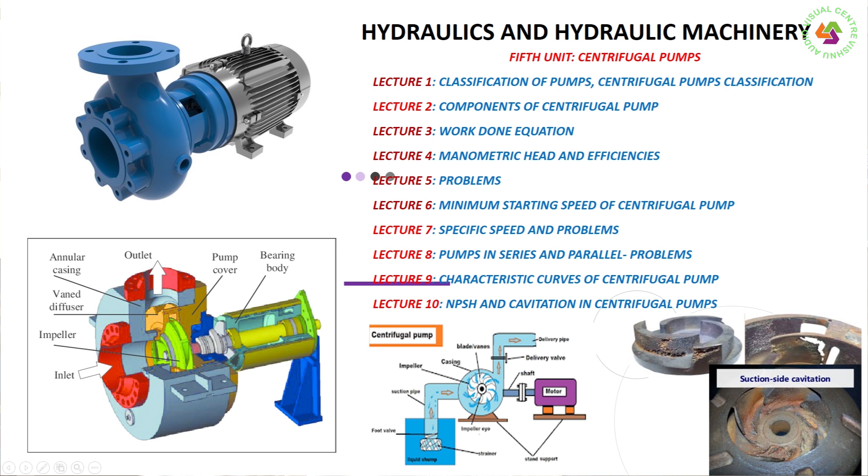A multi-stage pump means a centrifugal pump consisting of two or more impellers.

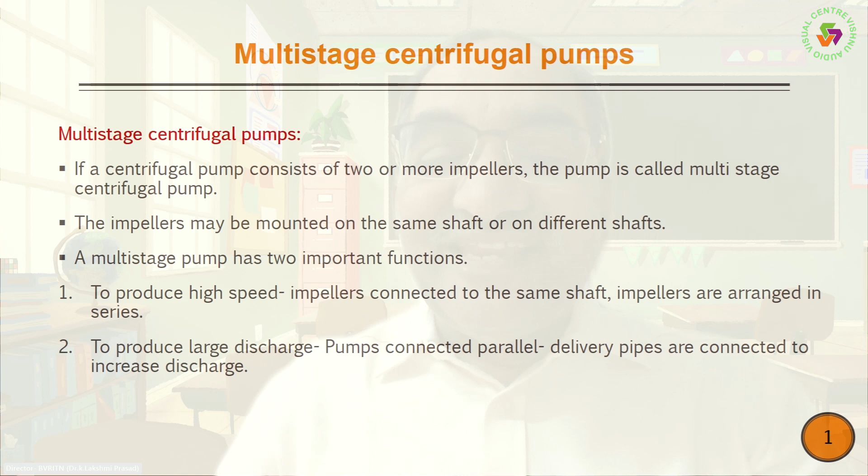They may be connected to the same shaft or to different shafts. If the impellers are connected to the same shaft, we call it impellers in series. If they are connected individually, one for each shaft, we call it pumps in parallel.

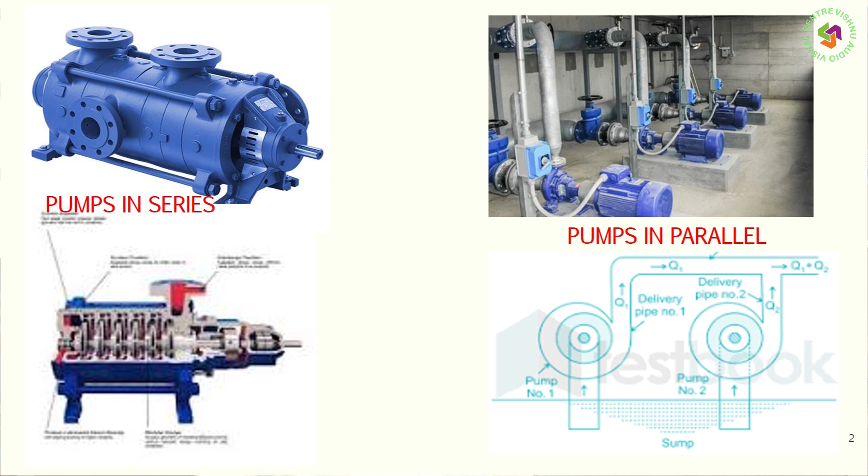So pumps in series, pumps in parallel. Pumps in series means number of impellers are connected to the same shaft. Pumps in parallel means each shaft has only one impeller. Like that we have different pumps, and the delivery pipes of all these are connected.

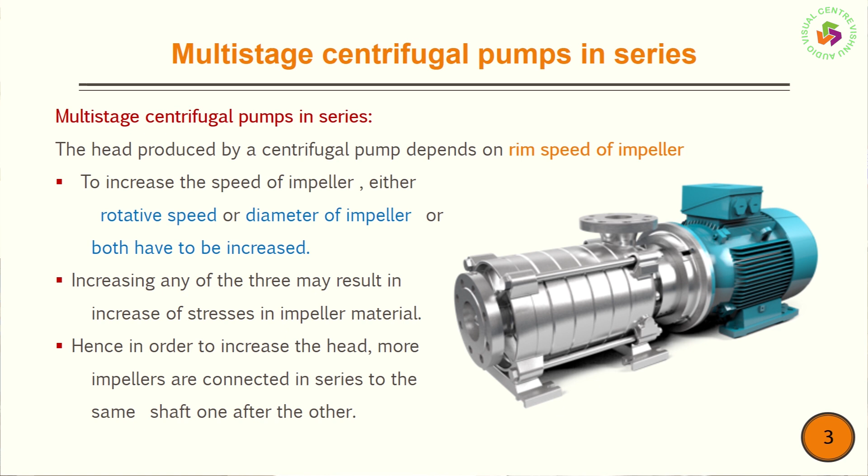Then why do we generally join more impellers? The purpose is to increase the head. If you want to increase the head, the option is either to increase the rotational speed of the impeller, or to increase the diameter of the impeller, or both.

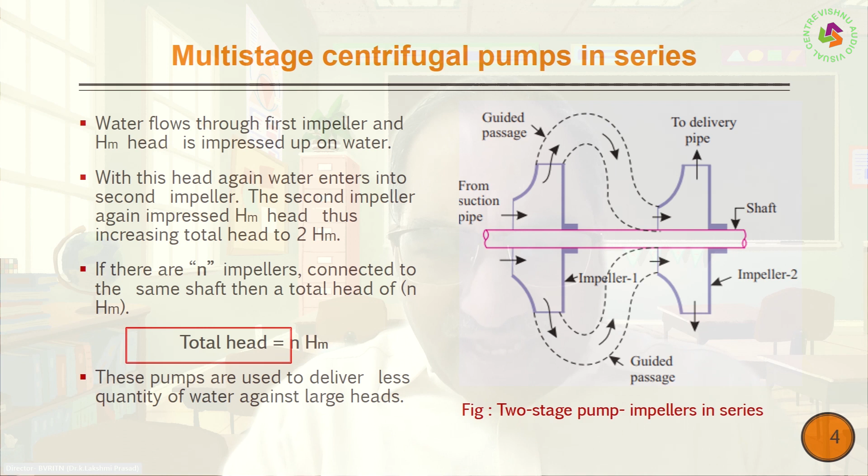If you go on increasing the impeller diameter and the speed, the stresses on the impeller will increase tremendously, and thereby the efficiency will be drastically affected. Hence, we arrange a number of impellers on the same shaft.

The same water flows through the first impeller, then through the second impeller, then through the third impeller, like that. So in each impeller, a certain head, which we call the manometric head, is impressed upon the water.

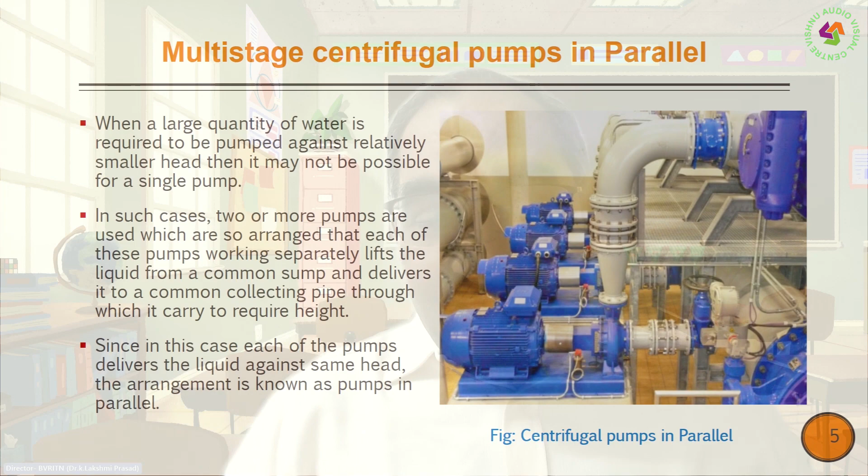When it flows through the first impeller, the manometric head impressed is HM. Again, the same water with a manometric head of HM enters into the second impeller, where it again impresses HM.

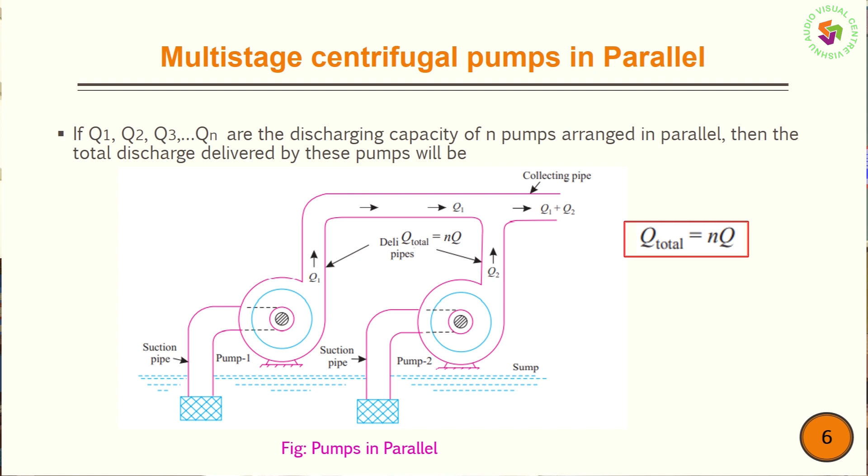So HM plus HM, by the time the water comes out of the second impeller, the total head will be 2HM. And if it enters the third impeller, then 3HM. If you have N impellers arranged on the same shaft, the total head will be N into manometric head.

So naturally your purpose is solved. It doesn't occupy much space. The diameter need not be increased, the rotational speed need not be increased, but you achieve your objective of increasing the head.

In order to increase the head, we connect the impellers in series, with a number of impellers on the same shaft. If there is only one impeller, we call it a single stage pump. Two impellers on the same shaft is a two-stage pump. Three impellers is a three-stage pump.

These three are common. Kindly visit the laboratory and observe. The moment you see a centrifugal pump, you can tell whether it has one, two, or three impellers. Visit the hydraulics and hydraulic machines lab of your department and see how many impellers are in the centrifugal pump.

So this is the starting point. Similarly, when pumps are connected in parallel, the first thing is we want to increase the discharge. If you want to increase the discharge, naturally each pump can discharge only up to a certain limit. So a number of pumps are connected, with the delivery pipes joined to each other. The first pump discharges Q1, the second pump Q2, the third pump Q3.

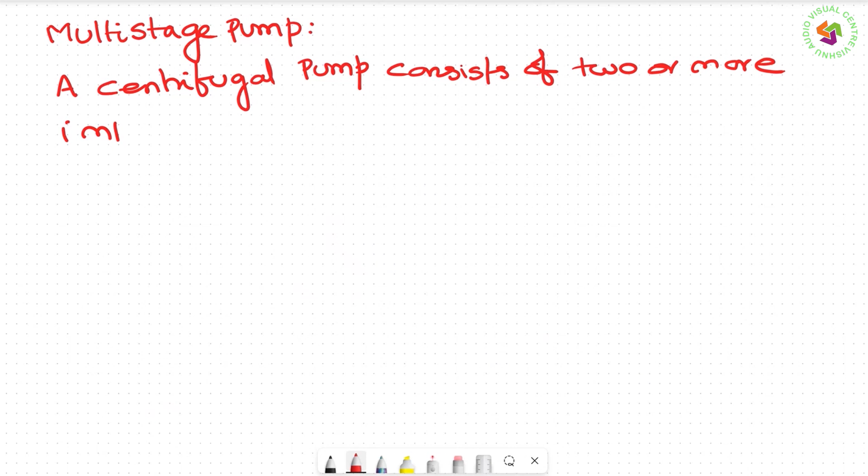A centrifugal pump consists of two or more impellers. Then the pump is called a multi-stage pump.

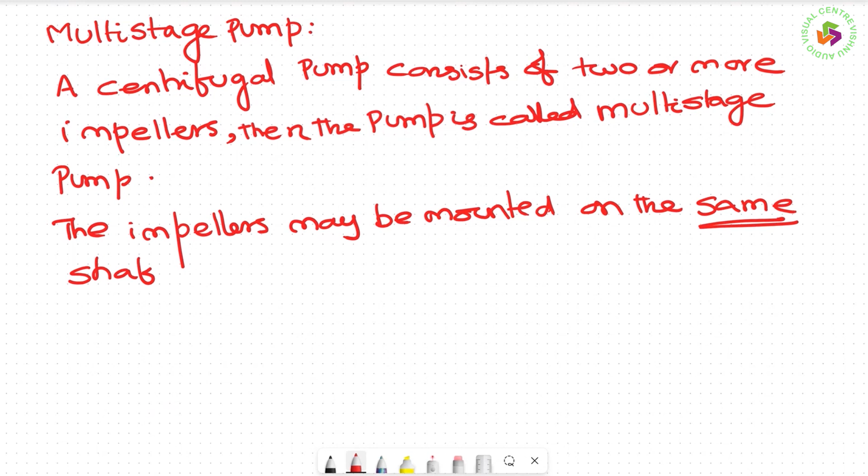The impellers may be mounted on the same shaft, or on different shafts - anything is possible. Then the functions of a multi-stage pump, which is very important.

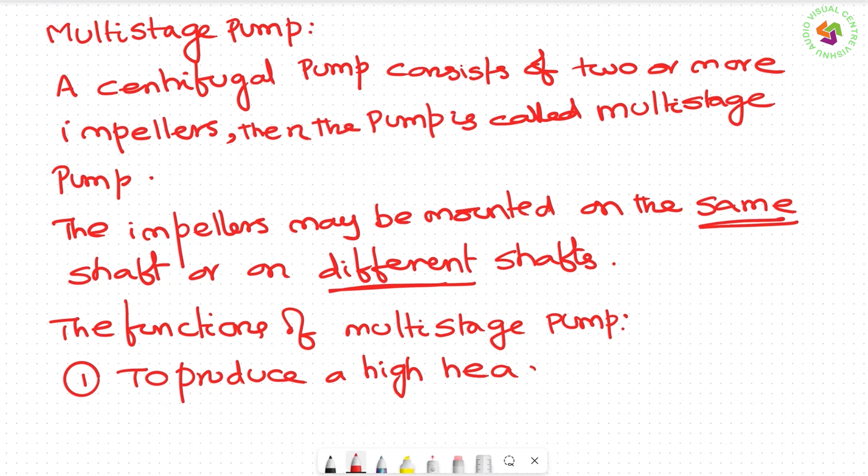The functions of a multi-stage pump: number one, basically to produce a high head. And the second function is basically to produce a large discharge.

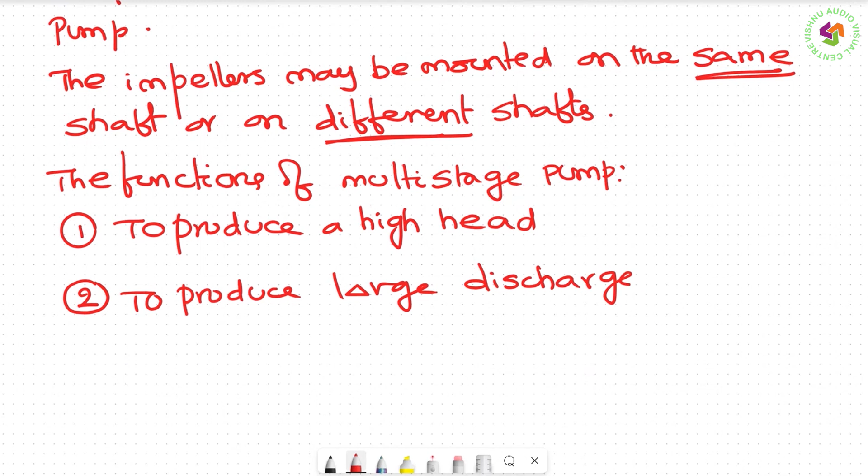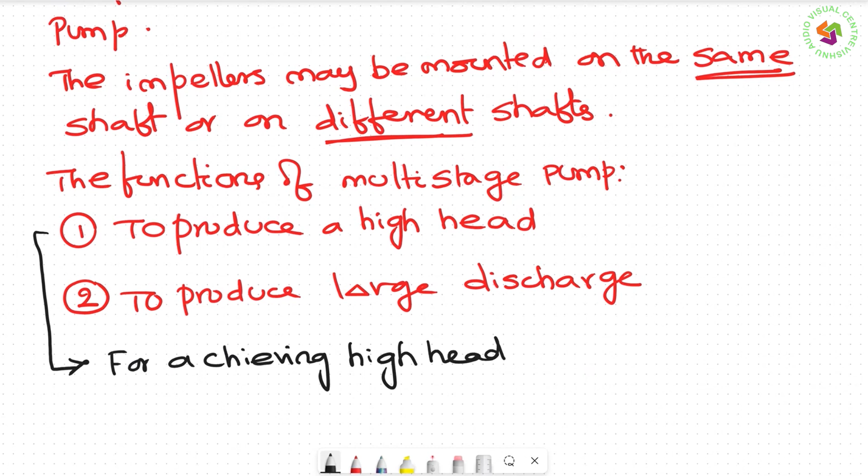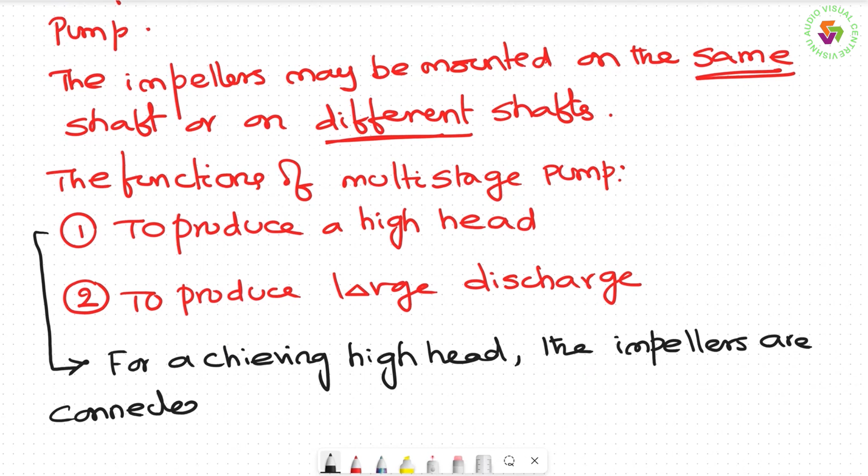Let us take the first one. If the priority is a high head, for achieving high head, the impellers are connected in series.

That means a number of impellers are connected to the same shaft.

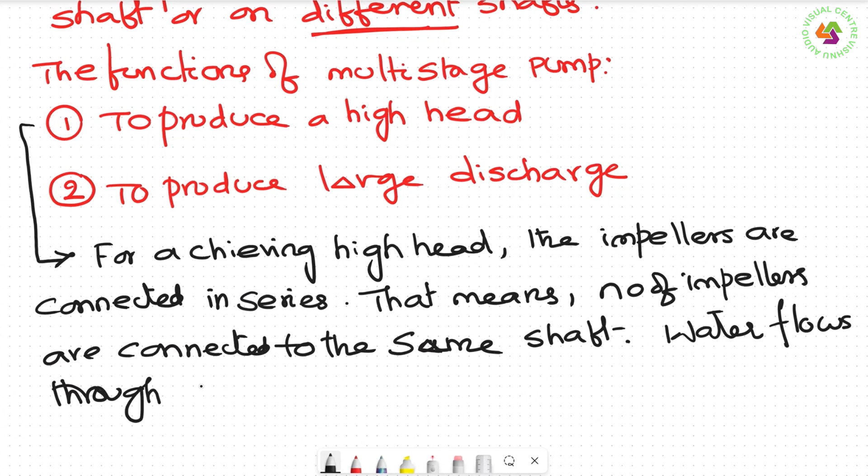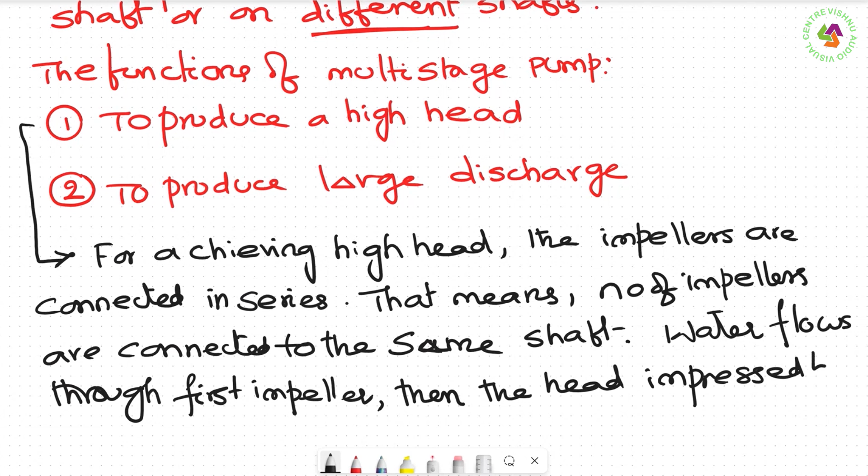Water flows through - when I say water, any liquid also you can take. Water flows through the first impeller, then the head impressed by the impeller is HM.

The same water with HM head enters into the second impeller. Followed? The second impeller again impresses a head of HM.

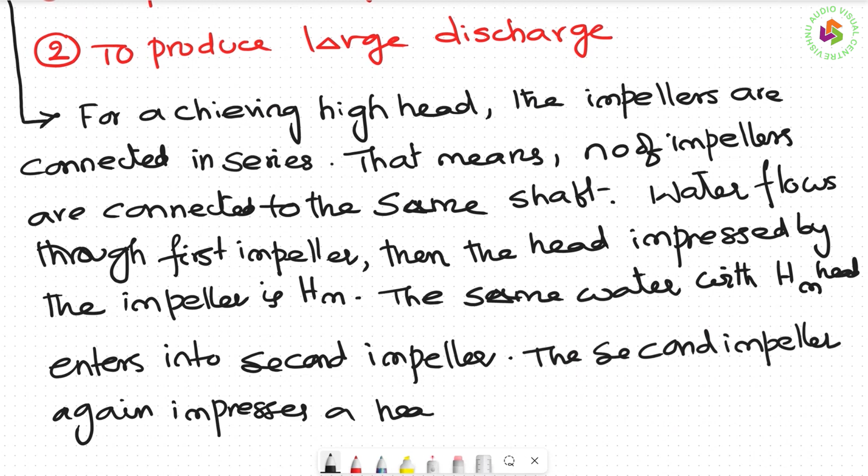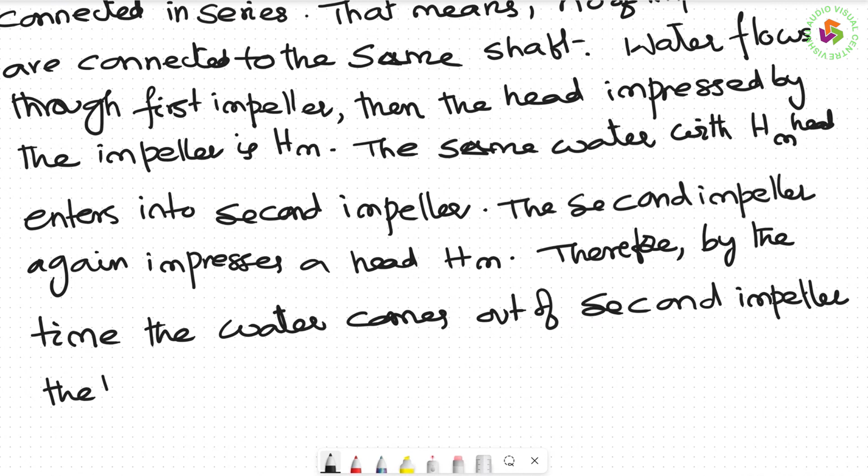Therefore, by the time the water comes out of the second impeller, the head is HM plus HM, that is 2HM.

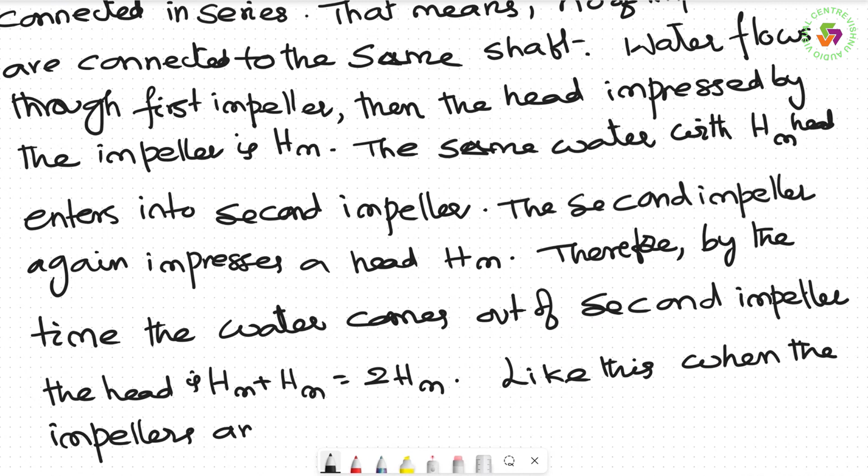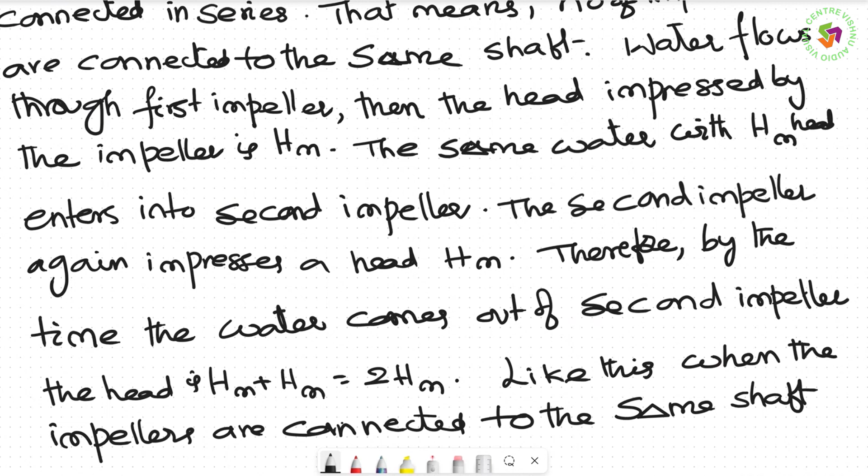Like this, when the impellers are connected to the same shaft, the head increases, and the total head is equal to N into HM, where N is equal to the number of impellers.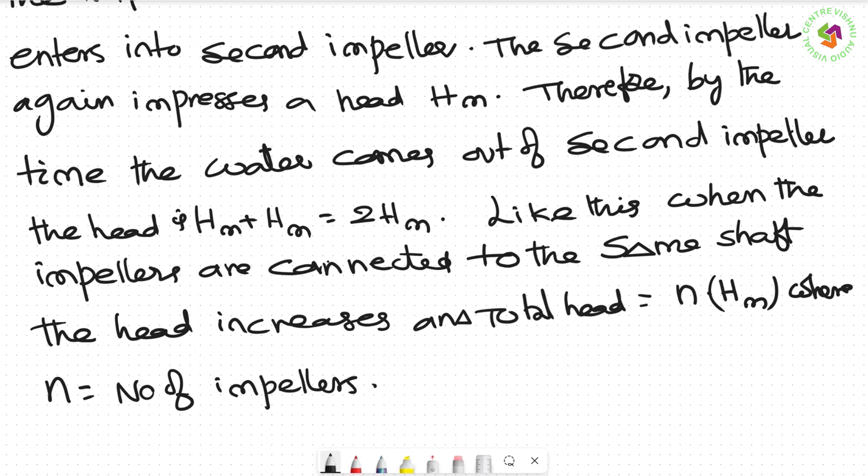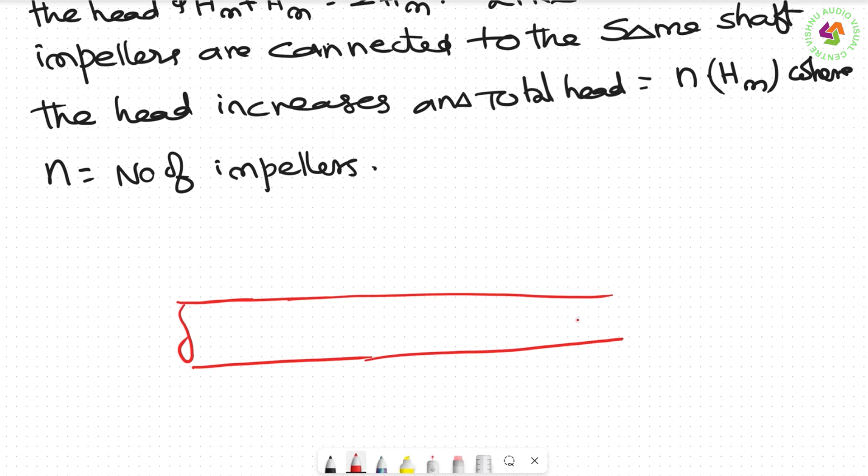I have already given the figure to you. If you refer to the first slide of your lecture, you can see that, but I will show it to you as well. For example, take this as the shaft - you also have to write it in the exam like this. So this is the shaft, and this is nothing but the impeller.

Like this, if I connect one more for understanding's sake, this is the second impeller. See how I am drawing it - so this is the second impeller.

This is the second impeller. Like that, any number of impellers you can draw. So I have drawn three for making you understand what will happen. The first one is a little bit difficult, but afterwards it is actually very simple. So three impellers, but of course all of them are of the same size, I've only shown them differently while drawing. So what will happen? Let me come to the point.

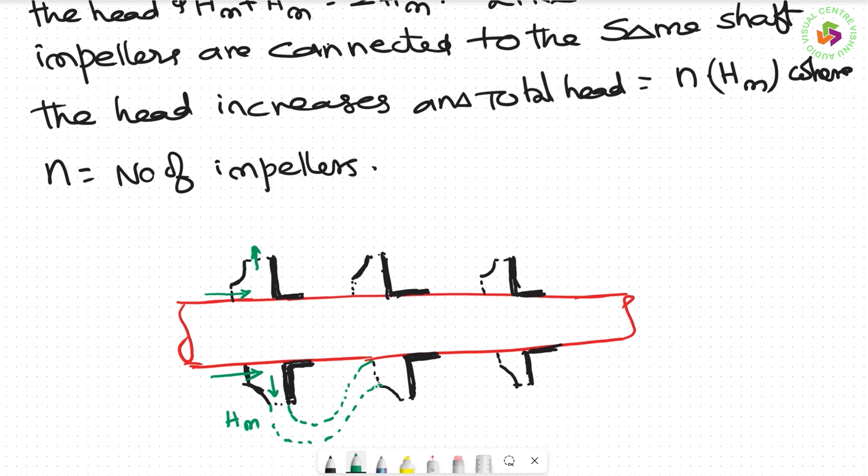How the thing is, first water flows like this, then naturally it has to come out like this. So when the water enters and when it comes out of the impeller, HM head is impressed upon it, right? This water with a head of HM will go into the second impeller. This is how it flows into the second impeller.

Same is the case. So it enters like this into the second impeller. This is impeller 1, this is impeller 2, this is impeller 3. So this also impressed a head of HM. So by the time the water comes out of the second impeller, total head will be 2HM. That water again enters into the third impeller, and again this impresses a head of HM. So by the time the water comes out of it, the total head is equal to HM plus HM plus HM, which is equal to 3HM.

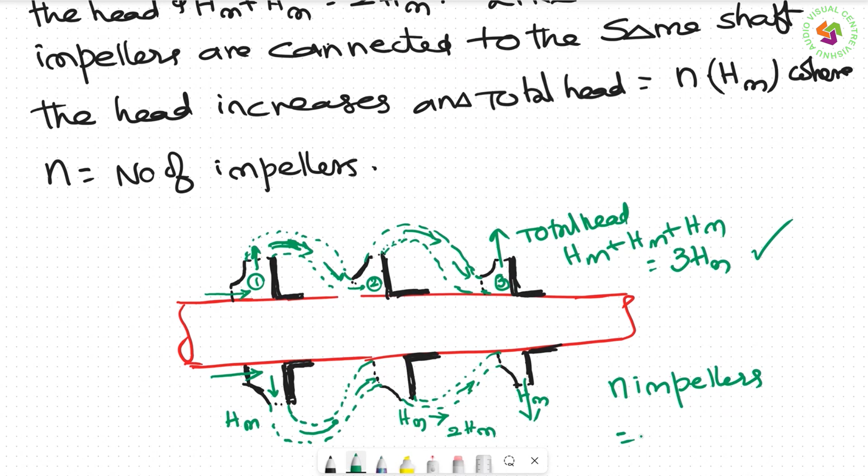I have not changed anything. One impeller, second, third, all are connected to the same shaft. The same water is flowing from first impeller to second to third impeller, and by the time it comes out of the third impeller, total is 3HM. If there are n impellers, then naturally total head is equal to n into HM, where HM is the manometric head. This is what we call pumps arranged in series. We will go into the next thing now.

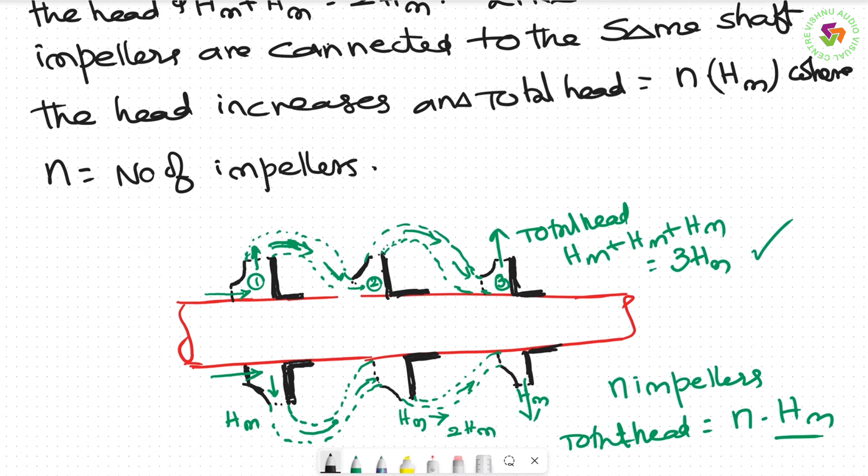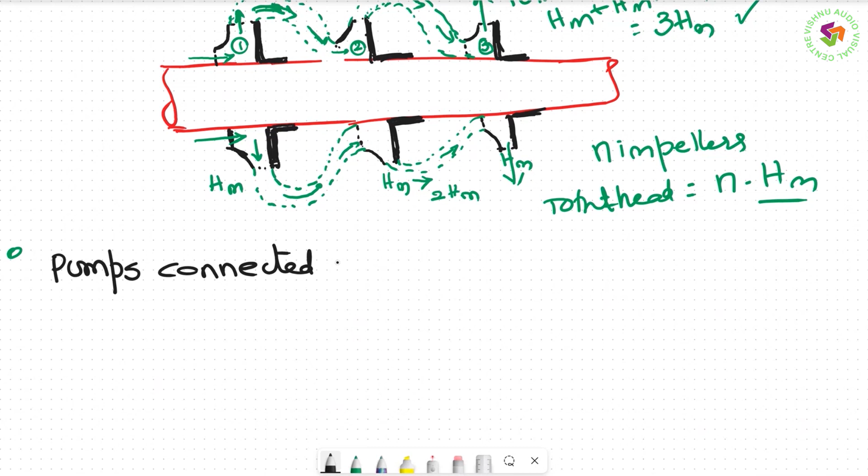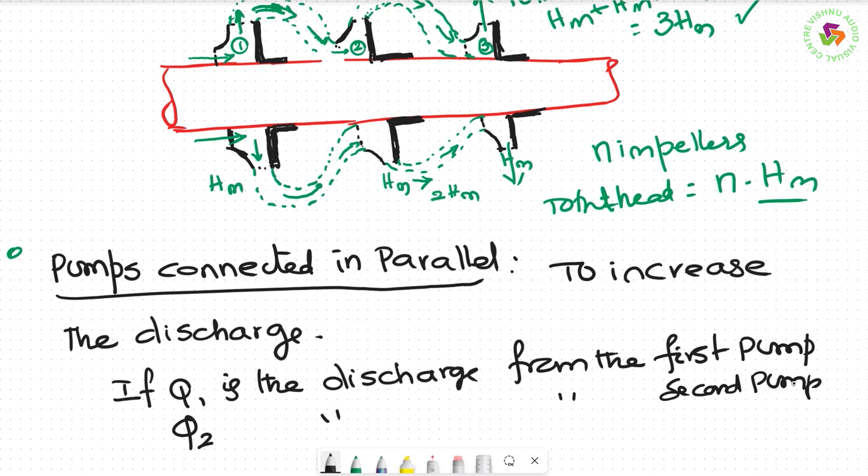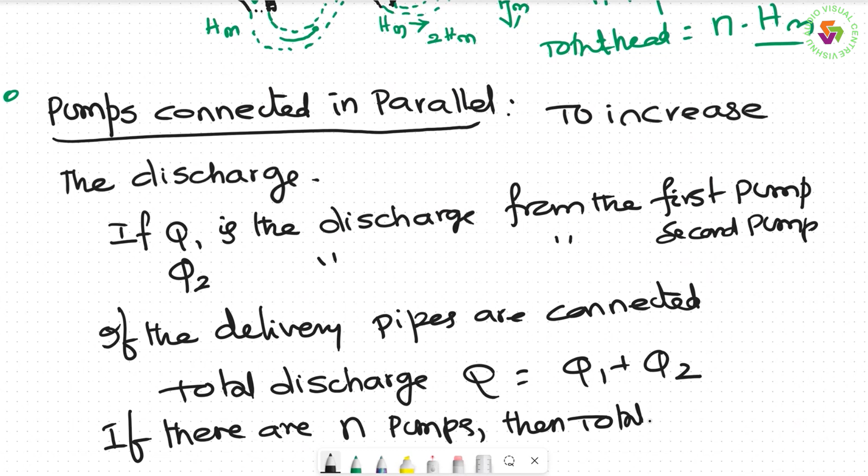Pumps connected in parallel. Generally, we connect pumps in parallel to increase the discharge. So if Q1 is the discharge from the first pump, Q2 is the discharge from the second pump, and if the delivery pipes are connected, total discharge is equal to Q1 plus Q2. If there are n pumps, total discharge is equal to n into Q. So, final conclusion.

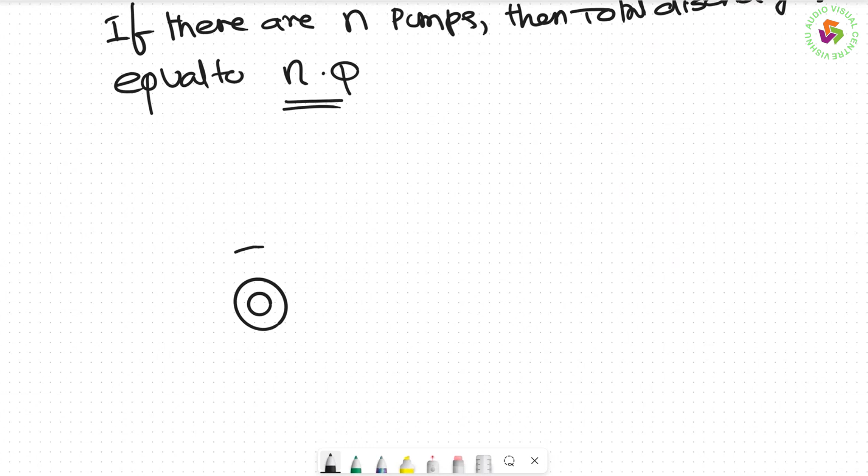This is again, you can ask me, sir, how to explain it? You show it, no issues, just let me draw it. You see, this is the shaft portion, right? Or the shaft portion next, in the case of a centrifugal pump, this connects to us. The figure has not come well, let me change it. First is the shaft, the impeller inside, the impeller outside. So these are the vanes, series of radial vanes. When the series of radial vanes is over, then naturally this is the pump.

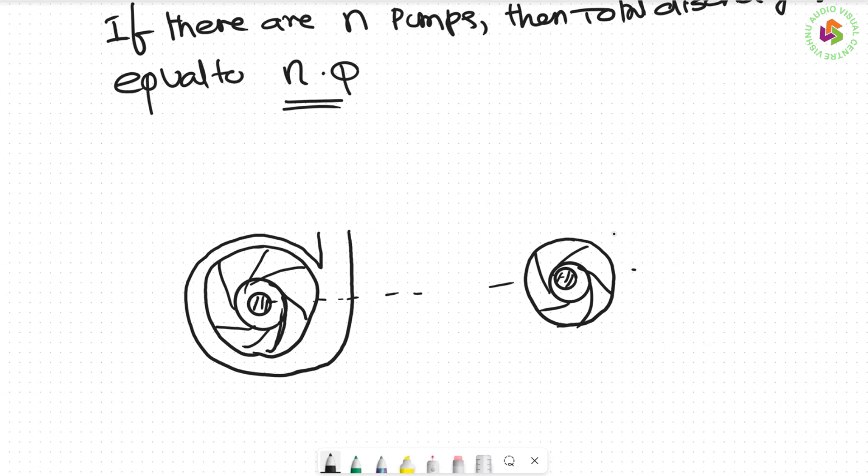This is one pump. So what I do is, at the same central axis, I will draw one more pump. So this is the central portion. This is what you call the impeller entry, this is the outer diameter, and these are the radial vanes. This is the second pump, I have drawn it just for understanding's sake.

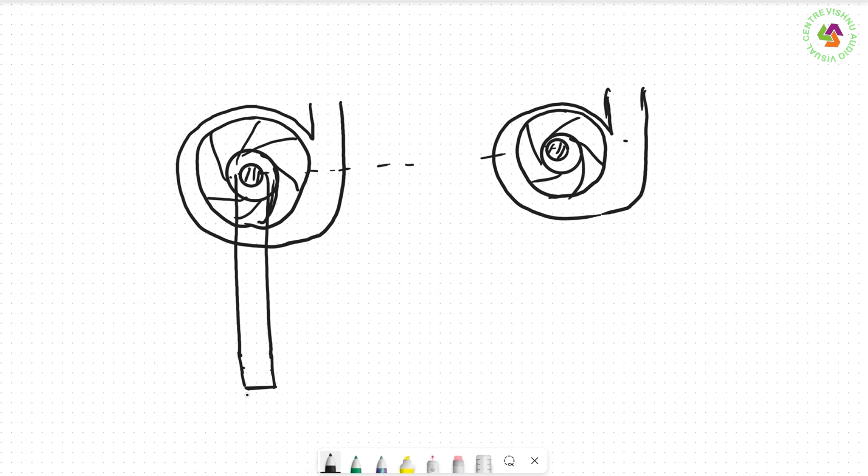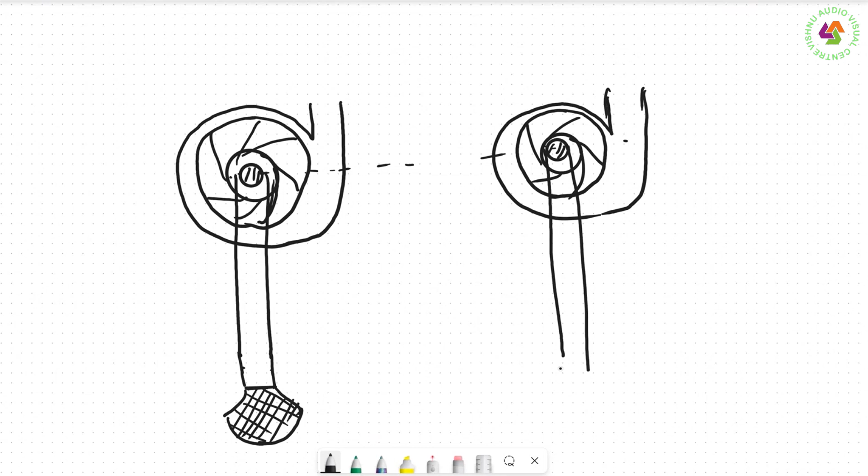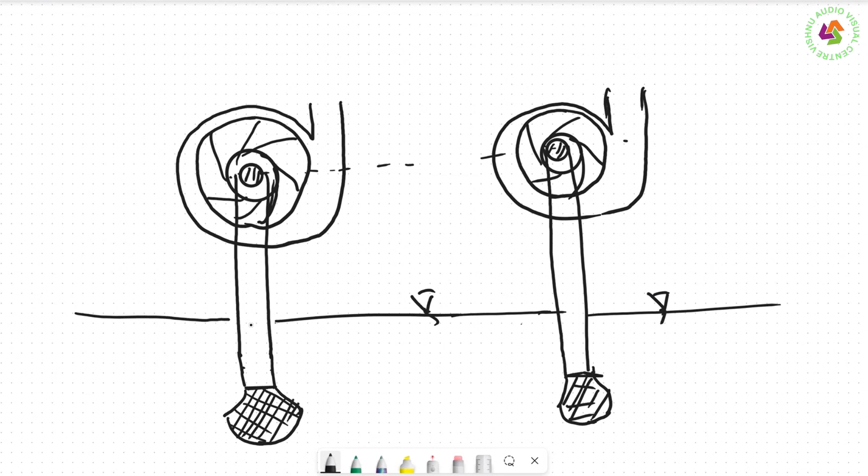Then what will happen? This is the suction pipe, and at the bottom of the suction pipe you all know there will be a foot valve, and this is the strainer. Generally the strainer will be notified like this, and similarly for this also: suction pipe, foot valve, strainer, and this is the water level here in the reservoir or sump source.

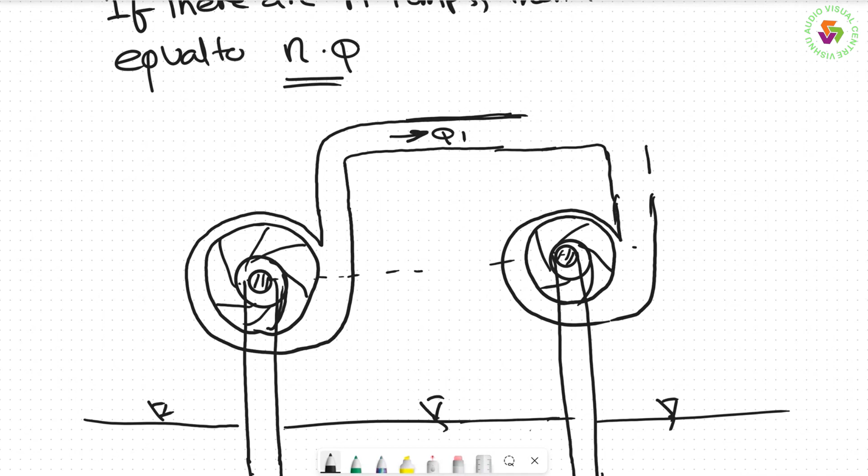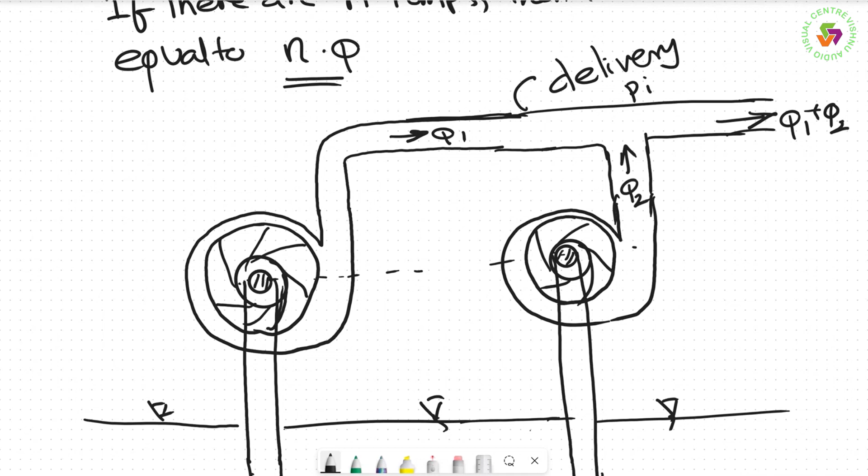Then what we do: suppose this pump will discharge a discharge of Q1. Now what we have done is the delivery pipes are connected. So this pump actually will give Q2, so by the time it comes out it is Q1 plus Q2. So what we have done is connect the delivery pipes to increase discharge. This is called pumps in parallel.

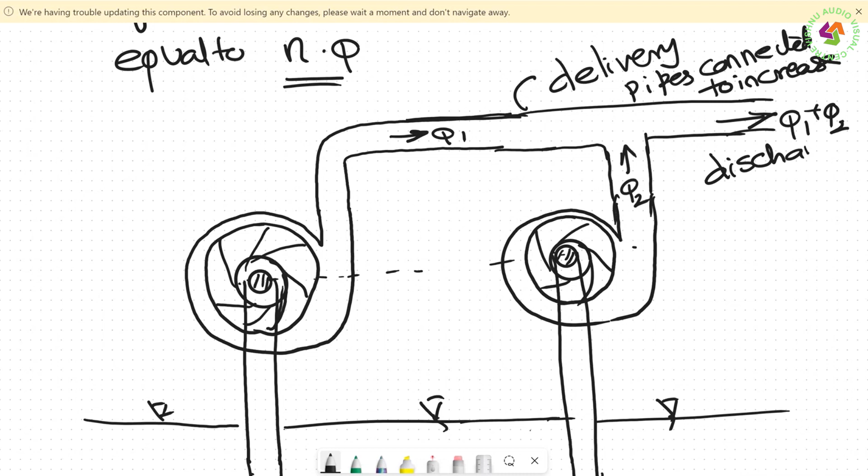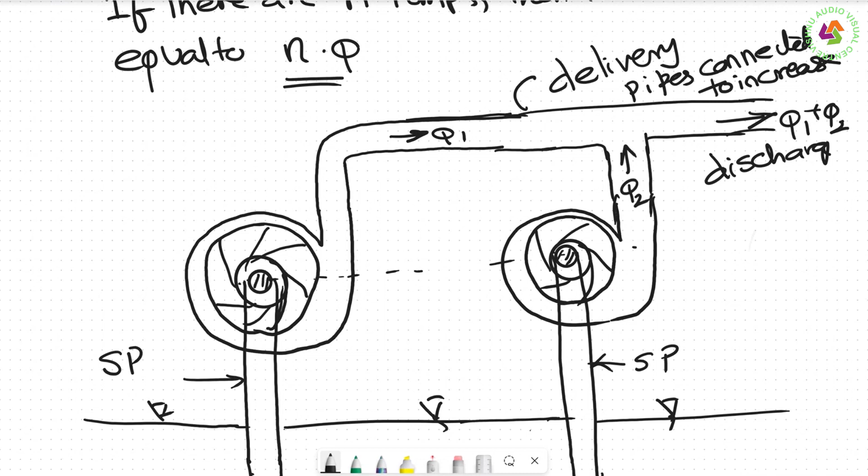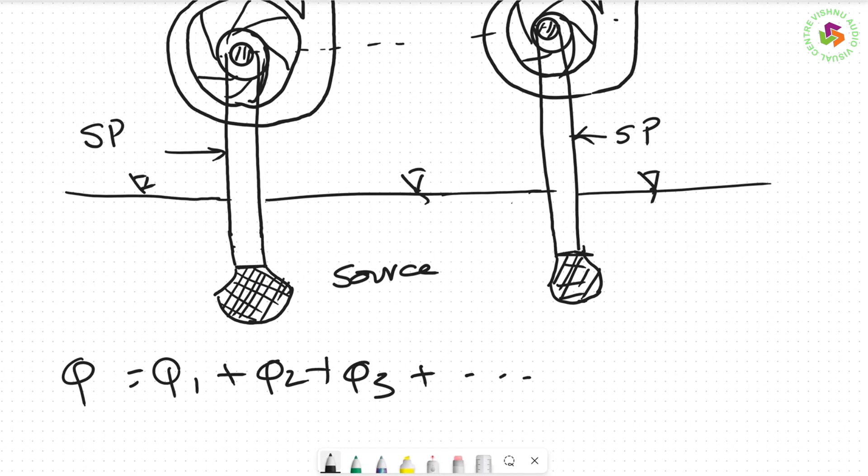Then otherwise this is the suction pipe, this is also the suction pipe at the source, so now this is how we will do it. If n number of pumps are there, total discharge is Q1 plus Q2 plus Q3 plus so on. This is what we call the pumps in parallel.

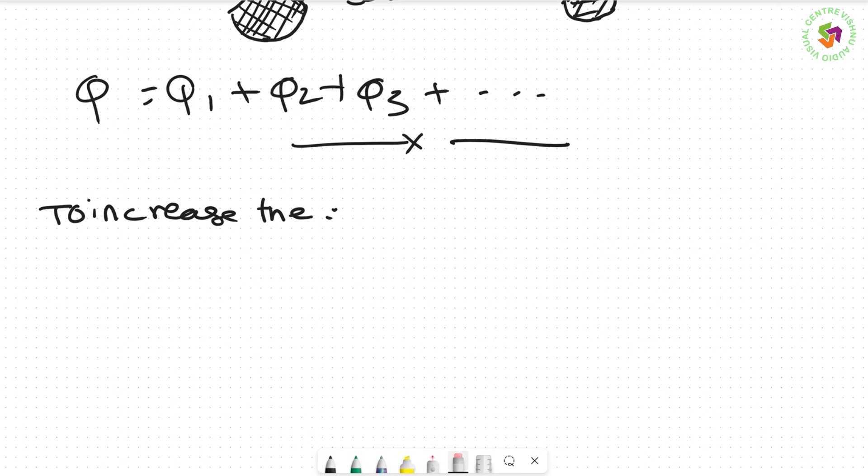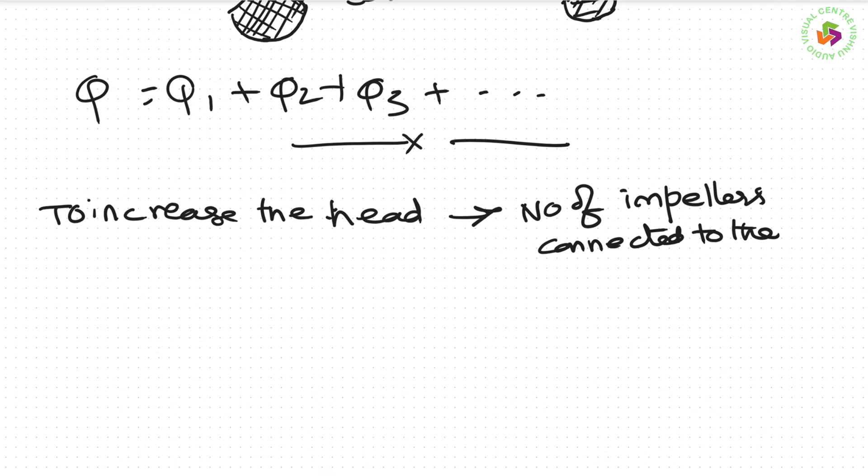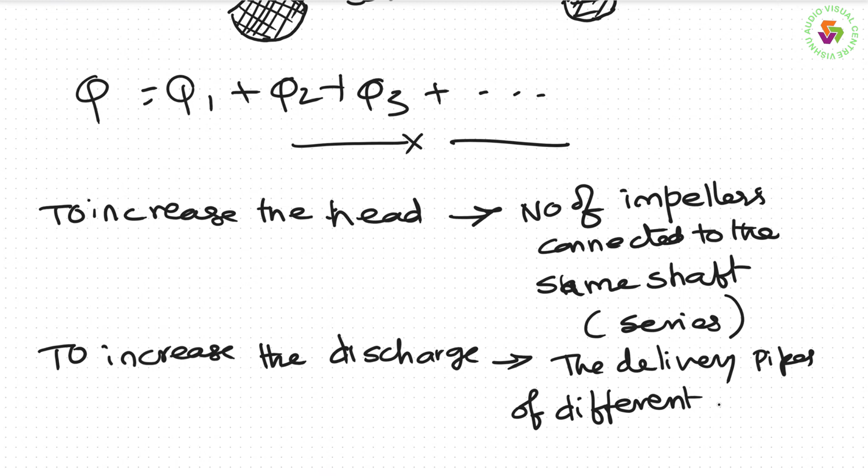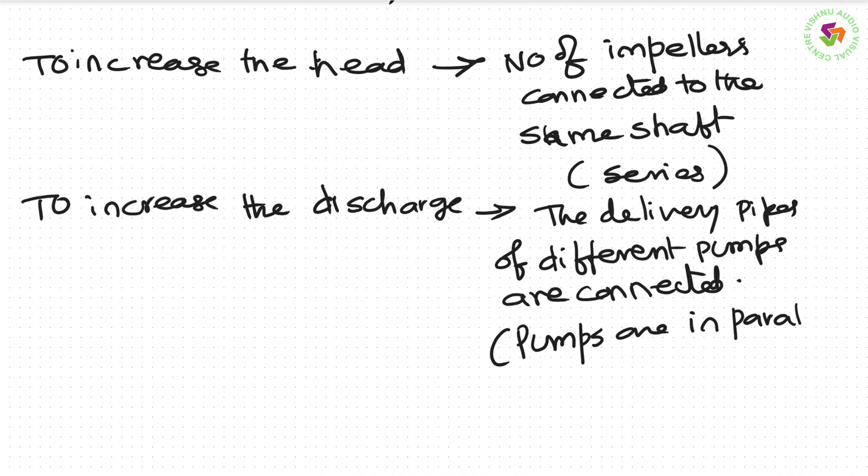Finally: number one, to increase the head, what do we have to do? To increase the head, the number of impellers connected to the same shaft, that is series. To increase discharge, the delivery pipes of different pumps are connected, here pumps are in parallel. So whether the impellers are connected to the same shaft or to individual shafts, as long as your system consists of two or more impellers, we call it a multi-stage pump.

So here I will stop my lecture.